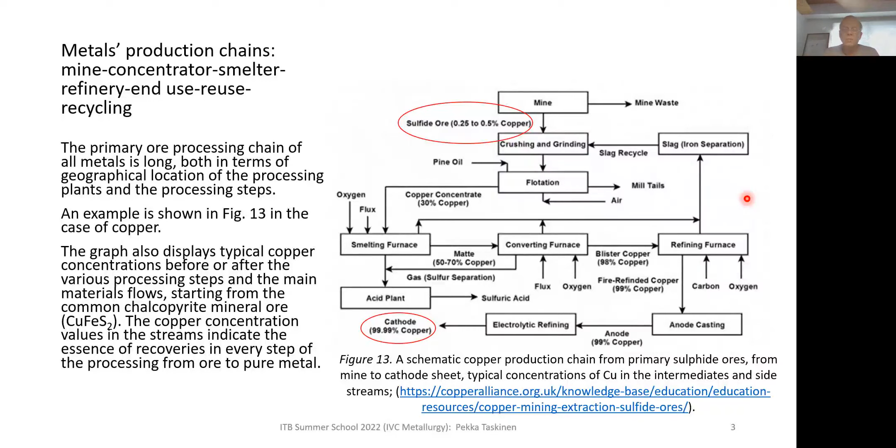So how we use energy, and how we have used energy in copper making - this means the smelting and refining steps after the mine site. Mining is actually consuming about 80% of total energy in copper making, and it is that step we have most issues to deal with in terms of sustainability.

So if we look back about 90 years, the cumulative need or demand of energy in copper making per ton of pure copper was about 70 gigajoules per ton, and its breakdown in the global production chains, including hydro and pyrometallurgy, and also this mining step, were included in that number.

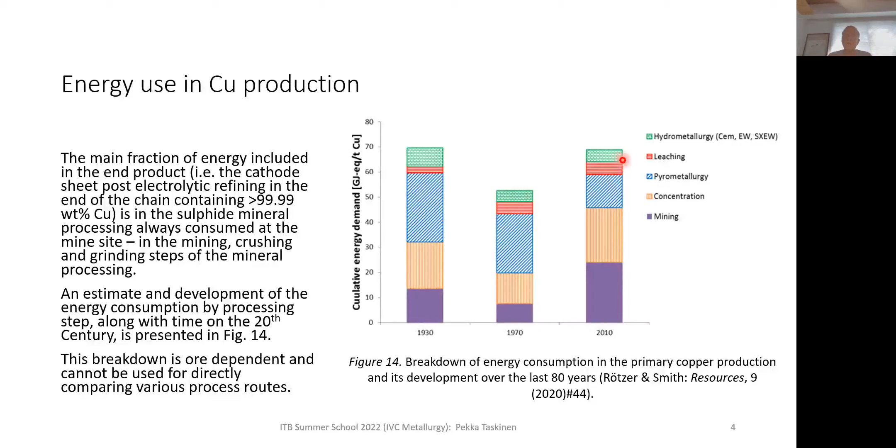The reason why these particular smelting operations are relatively energy lean is that sulfides have very large chemical energy content, and in many operations in the smelters - the furnaces, smelting vessels - in the primary phase and also in the converting phase, they are self-sustaining in terms of energy consumption. This is why the copper industry has all the time, already in the 1930s, used secondary materials as feed in the smelting, because there is excess energy to be dissipated.

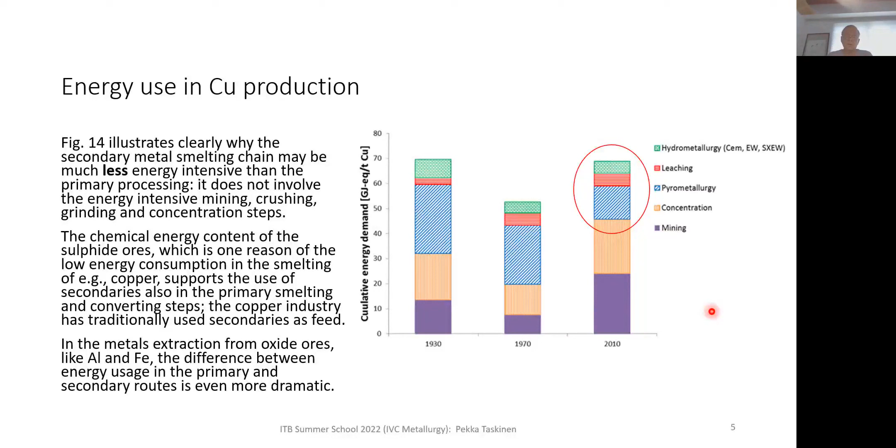So the big difference in energy demand between sulfide smelting and oxide raw material metals like aluminium and iron is in this specific feature - that sulfide minerals contain a lot of chemical energy, and the comparison is coming next.

In case of aluminium, we can say that the energy consumption in secondary aluminium smelting is very, very small compared to primary smelting. So if you look at this table, secondary aluminium smelting is consuming less than 5% of the total energy needed for primary aluminium smelting, and this is a relative number only, because the total processing of aluminium metal from bauxite ore needs a huge amount of energy compared to copper smelting.

More than, or almost about, 2.5 times that energy required for copper making. So it's about how much energy is needed in making the metal - it's about the primary source of the metal, so the ore, what it is in terms of chemical composition, and how, in a thermodynamic sense, how noble the metal is. Aluminium is very, very unnoble compared to copper or even iron.

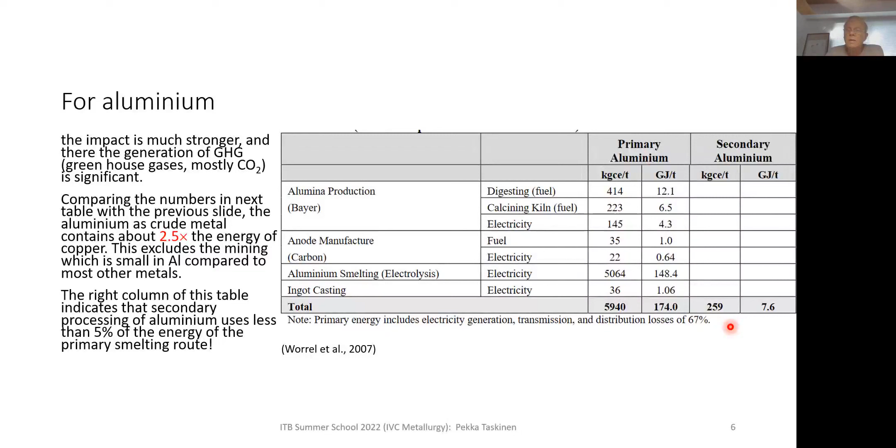As I mentioned earlier, there has been a dramatic change in the ore grades over the last 100 years in copper making, but also in other metal production branches. This picture shows the trend line for copper ores. 100 years ago, even crushed and ground ore was used as such, as a feed in copper making. But then the ore grades degraded so much that it became impossible in the 40s and 50s, and nowadays we don't have such rich ores which could be utilized for copper smelting in the world.

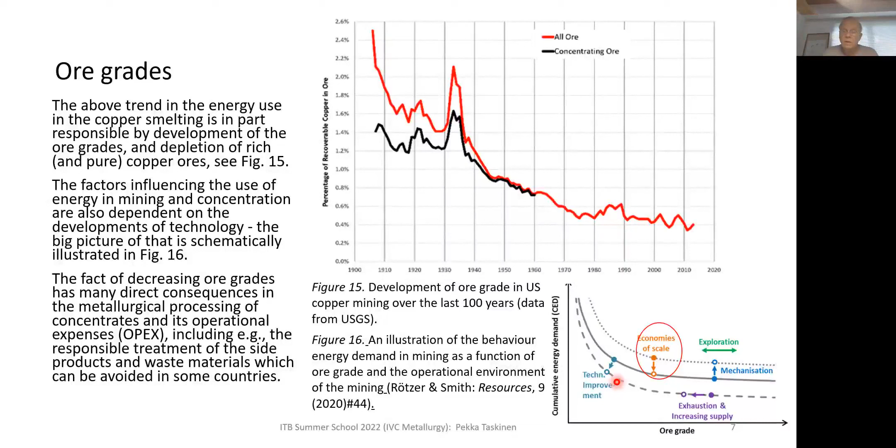One big issue in all metals production, particularly today, is the environmental emission generated by a particular metal. The emission which was most important some 50 years ago was sulfur dioxide. That problem or issue has been solved today, and already in the 70s - I will discuss that a bit later. But today we are facing global warming due to CO2 emissions, and there are also emissions to soil and water, in addition to these gaseous emissions to air.

And in order to treat these emissions, we must spend money. So it's costly, and we need more advanced smelters, more advanced treatment methods. And what we also need very much, because this has not been very much voluntary action by the mining and smelting companies, is international rules and actions requiring responsible behavior in smelting and refining of all metals.

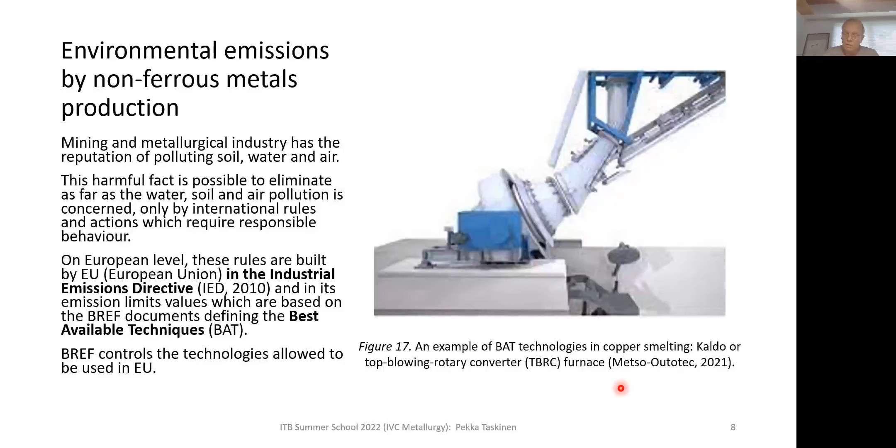Responsible behavior in terms of sustainability includes this global and local emission control, to such a degree that the soil, water, and air is not polluted locally or internationally. This best available technology reference document is today called BREF, and it was recently updated some years ago.

In copper making we have well-known technologies included in these BREF documents. In copper and nickel making we have flash smelting and flash converting, and the DON - Direct Outokumpu Nickel technology - which are the best available in these technological areas for producers to apply.

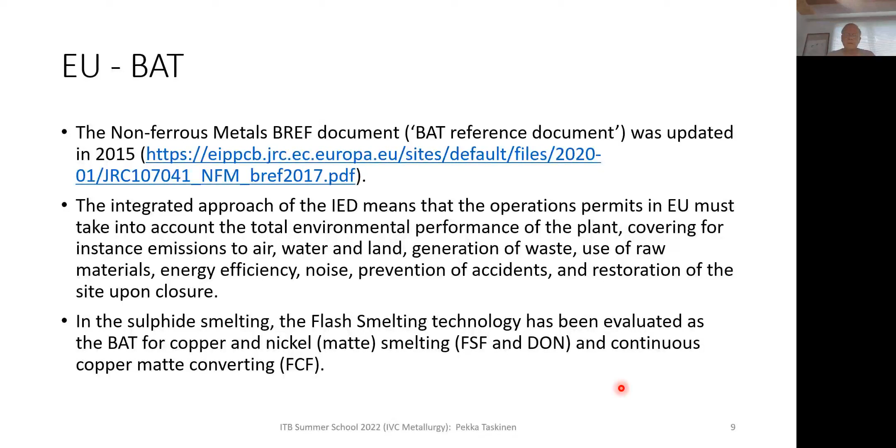There are also issues with other dimensions than these pollution issues: noise, prevention of accidents, and restoration of the site when the smelter or mine is closed. These are important issues for future operations.

Today we are very much talking about CO2 and other greenhouse gas emissions, and this is a big issue for those metal makers who have oxidic ore as raw material. The biggest in volume is iron and steel made out of crude hot metal, or pig iron, which today accounts for about 9% of global CO2 emissions. There's a very strong driving force for replacing the use of carbon in the iron making process chain.

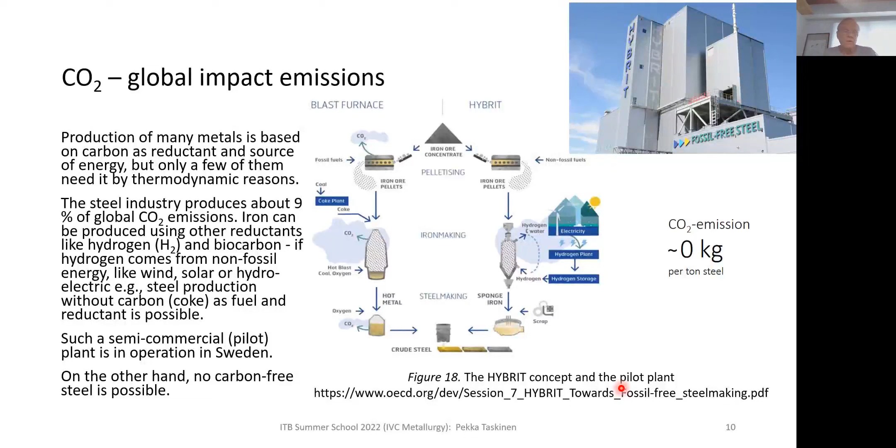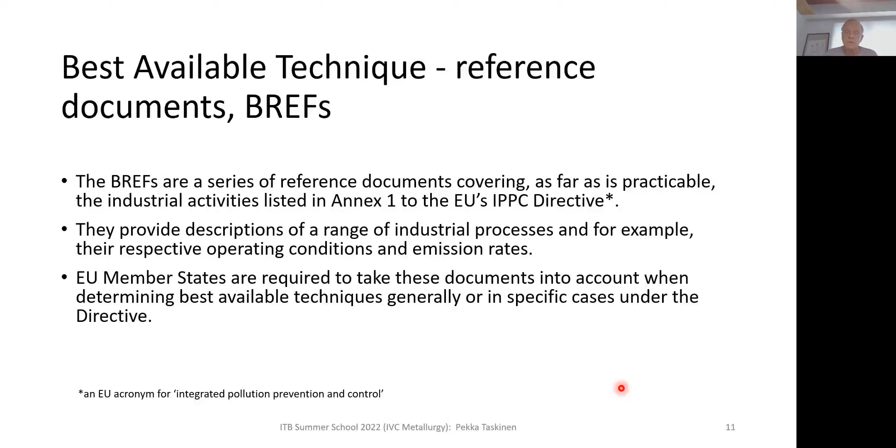As I said about these BREFs, they are a series of reference documents covering all industrial activities, not only metallurgical ones. They are descriptions of technologies to be used, the operation conditions, and the emission rates they generate. In the European Union, member states are required to take these documents into account when determining permissions for companies to build smelters and refineries in our field. So it must be according to these directives.

But let's go into copper production in more detail, and its technology development, and how that has been reflected in energy consumption and emission issues on a global scale.

As you may know, we have had several options for making the concentrate smelting into matte. This is the selection from some 40, 50, or even 70 years ago, when the flash furnace was included. Most of them have been disappearing.

So the remaining technologies are either not listed here, or they are these two: flash furnace and Mitsubishi furnace. Electric furnaces don't exist anymore. Reverbs are probably 2 or 3 in the world, and blast furnaces are not here anymore. But we have some other technologies which have been replacing basically this reverb type of smelting.

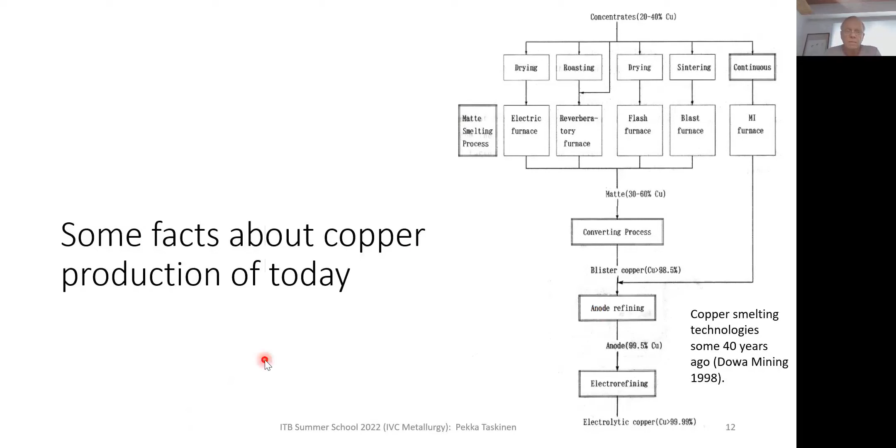So how much are we emitting in carbon dioxide when making copper, and how has that specific emission developed over the years?

We have several, at least a few, big consulting companies which collect data, and those data collections are very expensive. So I have used data here that is a bit more than 10 years old, with some material from more recent sources. This is data which typically is not available in university libraries, so it is a bit old, but we can see the trends nicely.

The average copper smelting industry, in terms of CO2 emissions, is somewhere like a bit more than 1 ton of CO2 for each ton of copper produced. This is a relatively small amount, even if it is a big amount.

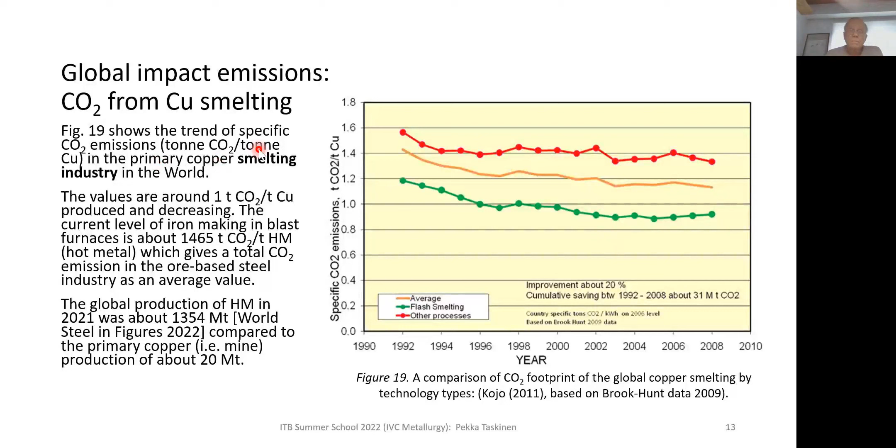So after the 1960s, SO2 washing steps were added in big coal-fired power plants all around the world. That was one step further, and the other step was that the copper industry gradually turned their processes into flash smelting, where the SO2 capture is very good compared with reverbs, blast furnaces, roasters, or electric furnaces using mixed calcine feed. And the trend is shown here.

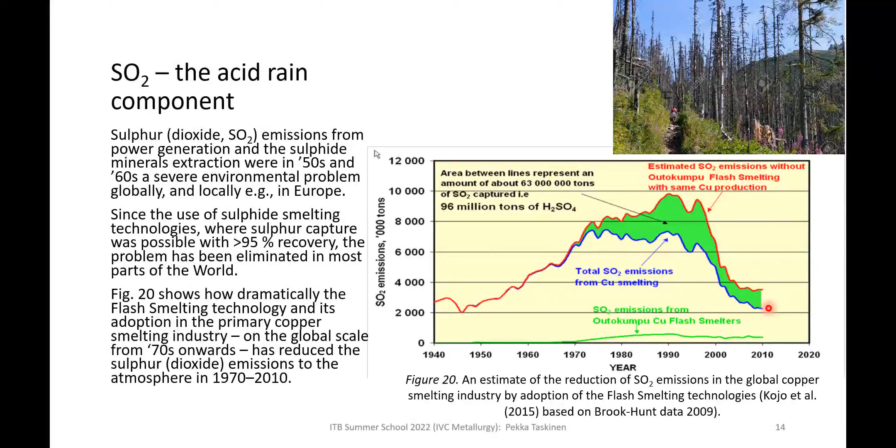Why is this technological step so huge? That is because reverbs, roasters, blast furnaces, and electric furnaces have such lean SO2 streams in their outlet that it is, and it was 50 years ago, impossible to make sulfuric acid out of that gas mixture. And flash smelting, which was originally already producing rather rich SO2 off-gas, 15-20%, so it was even more favorable from the 70s onwards.

When oxygen enrichment was adopted in the flash smelting technology, so the sulfur recovery to acid in sulfide smelting became an important issue, and that is how we rather quickly got this kind of views in forests removed. Nowadays in Europe we don't have problems with acid rain anymore. We have not had any major problems with acid rain here since the 80s.

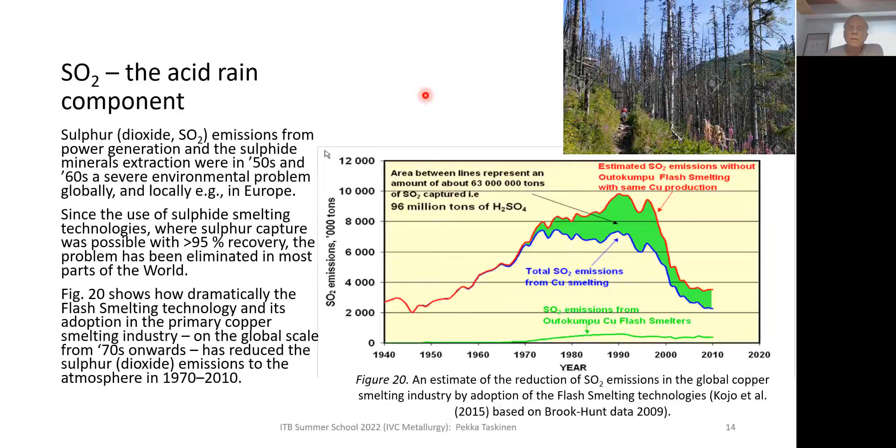So if we look at the average technologies, all smelters together in copper making, the sulfur capture or efficiency has been improved - this is only from the 1990s - from about 60% to more than 90%, and flash smelting technologies have always been above 90% here. The sulfur capture of other smelters, for the very reason I mentioned a few seconds ago, was extremely low, and there were some, and still are, local problems with this sulfur issue, but they are not major worries on a global scale.

So what has been a side effect of this increased sulfur capture in copper and nickel making, also in lead smelting, is that the use of pyrite and elemental sulfur in acid making has been decreasing, and this means that the resource efficiency of minerals processing has been increased as well.

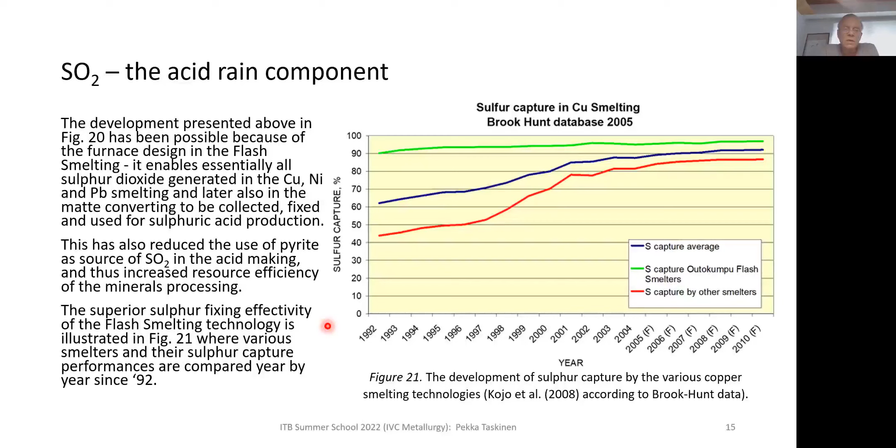So when we are running any metal making plant, as I showed in some early slides, we need to constantly think about improvements in technology, and that means lower energy consumption, but it also means improvements, higher recoveries of the metals, and how this specific energy consumption - energy consumption divided by the produced tonnages of copper - has been developing in Europe.

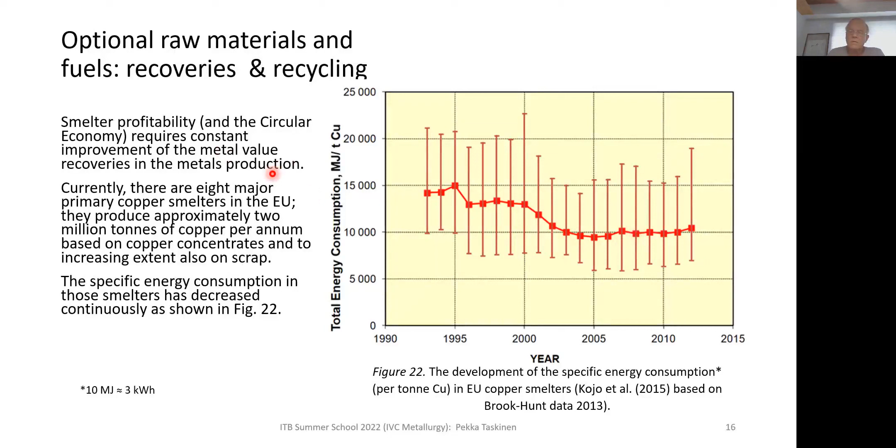This development is seen here as well, in Europe, where total production of copper is about 2 million tons. We see a constant increase in the scrap in our smelter feeds, and that has a clear impact on the total energy consumption. It may bring additional headaches in the processing and refining stages.

We will see how this develops when e-scrap, electronic scrap, comes into smelters in large quantities, and requirements about the recovery of minority elements in e-scrap will be faced in the near future.

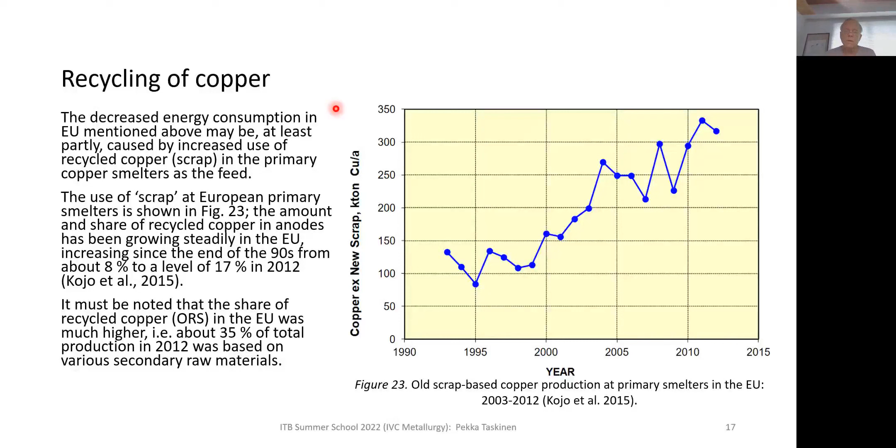So how is the status? How much do we recycle metals today? This UNEP survey on recycling is rather, how to say, disappointing to read.

We can follow the recycling of metals in several ways. We can follow how much of the end-of-life metal is collected - we call it the old scrap collection rate. That is one numeric in the recycling business, used in evaluating how well societies and industries are performing.

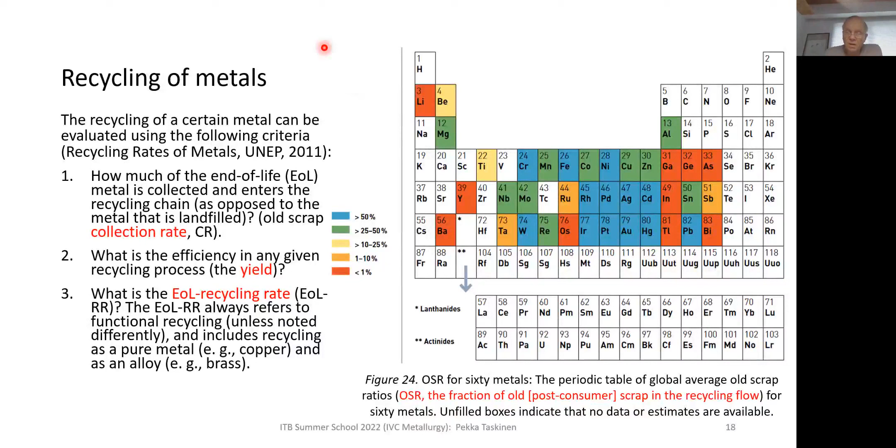This UNEP report has followed and collected at least rough approximations on how various metals are recycled, and those recycling and collection rates are amazingly small if we look at the whole periodic table. This is statistics from about 12 years ago. We can see that very few metals are recycled.

Even half of it - lead is one of them, niobium for some reason, and some ruthenium, which is probably a special case. But then these normal engineering metals - iron, nickel, cobalt, manganese - their recycling, even though it has been done for decades, is still between 25 and 50%.

Aluminium and some precious and platinum group metals too. But then there are an amazingly large number of metals like copper, zinc, tin, titanium, chromium, which have recycling rates less than 25%, and many of these so-called new technology metals have recycling rates of less than 10%. Amazingly enough, some precious metals and platinum group metals, even though they are so expensive, their recycling is practically non-existent, like osmium, let alone lanthanum, rare earths, the lanthanides, which are very scarce in availability.

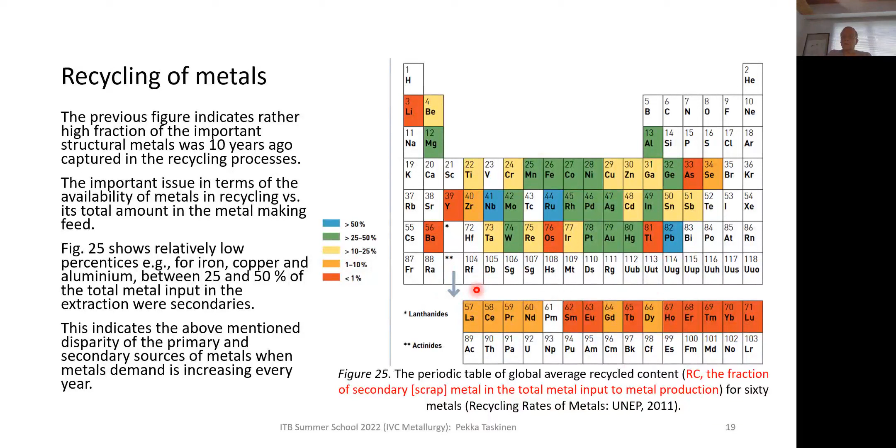Some countries or geographical areas have defined metals based on their availability, as has individual countries in Europe, but also the European Union. The US has a list of critical metals, and those lists are to some degree living all the time, because the needs and demand of metals is changing all the time.

Very few people could forecast 20 or 30 years ago the huge demand of these metals needed in energy storage, and that has been changing the general pattern very quickly in these lists of critical elements. So it's not anything cemented very strongly in the agendas of the countries, but it is a list of elements considered sensitive in terms of availability in the near future.

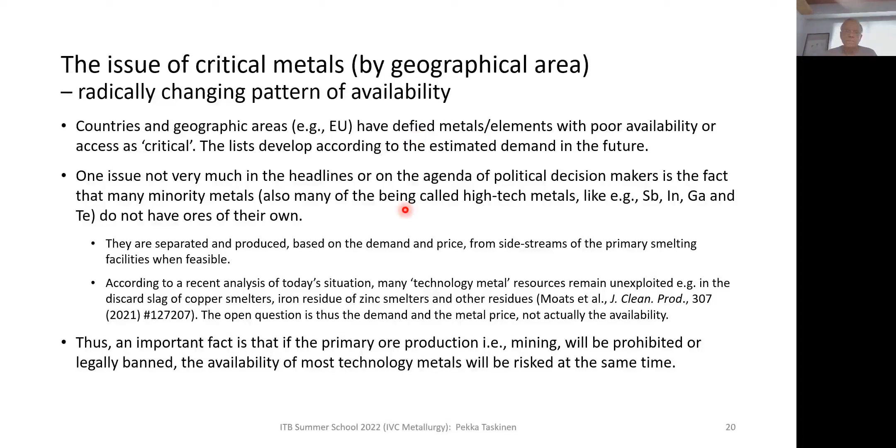As I mentioned already a few slides ago, some very expensive metals have amazingly low recovery and recycling rates in our present technologies, and it is strange because many of those elements are used in specific purposes. It is strange that their recycling rates are low. It is clear that an element like gold, which is mostly used for jewelry, has a high recycling rate.

But at the same time, we have problems with some platinum group metals, and a lot of them are lost in either collection or processing, which may be due to the small concentrations of these elements in our metal making secondary and primary streams.

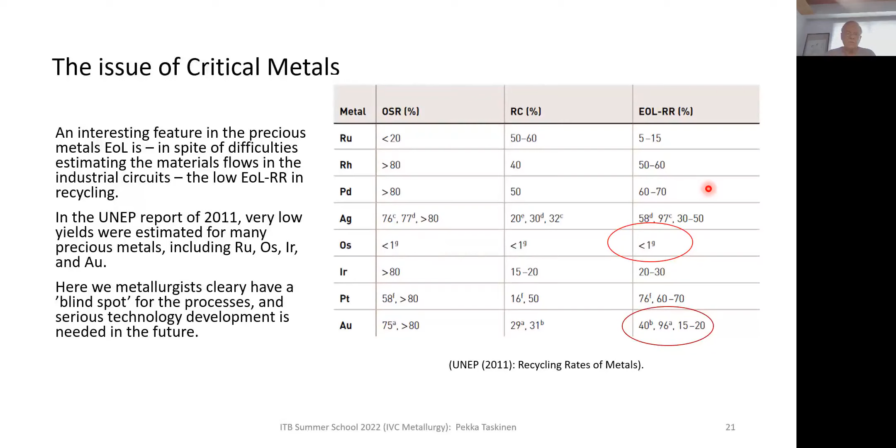This is something I have been worrying about over the last couple of years, and it is clear that we don't have suitable processes and technology development taking place for these elements, which are genuinely rare in the Earth's crust. So this is where metallurgists of the future have a clear and serious place in developing new technologies for the industry.

All right, this is my lecture of today, and now there will be a lot of time for questions and comments and whatever you may have in mind. So please.

Thank you, Pekka. It is so nice. Also, you mentioned before you ended that in the future metallurgists need to recover some rare metals that until now are difficult to recover because the yield is very low. Is that true?

Yes, we have also a lot of challenges. Also rare earths recycling is still very low. I see also like lanthanum. That's why when I came here, I started to think maybe the reason the yield is very low is because we still don't understand very much about the behavior of these metals during recycling, like in the slag and something like that. The limited thermodynamic data, maybe that's one of the issues. Do you agree?

Yes, it is an area where severe and strong development work must be done, but not only in the field of processing. It is also very much a problem on the collection side of end-of-life rare earth objects.